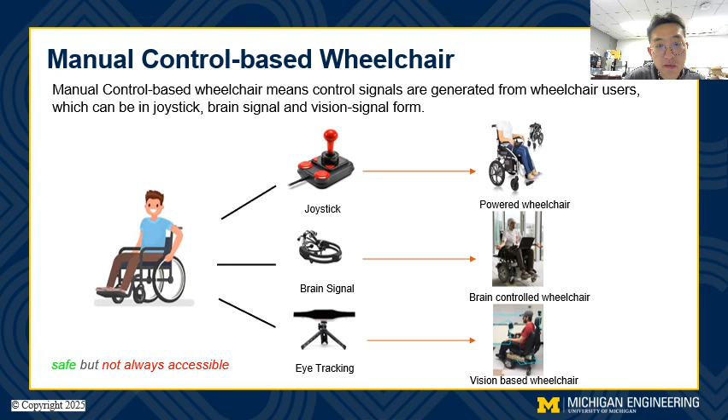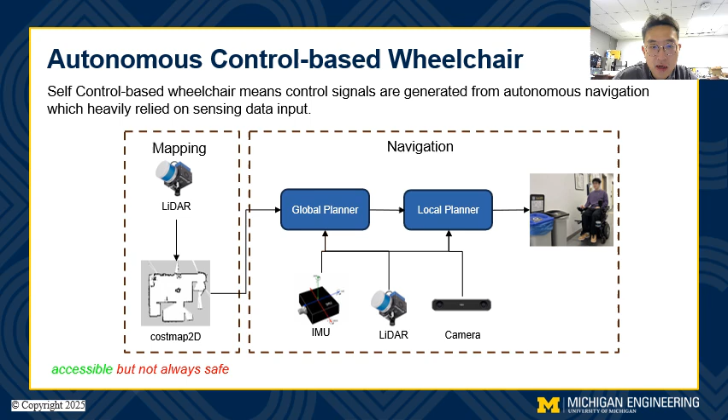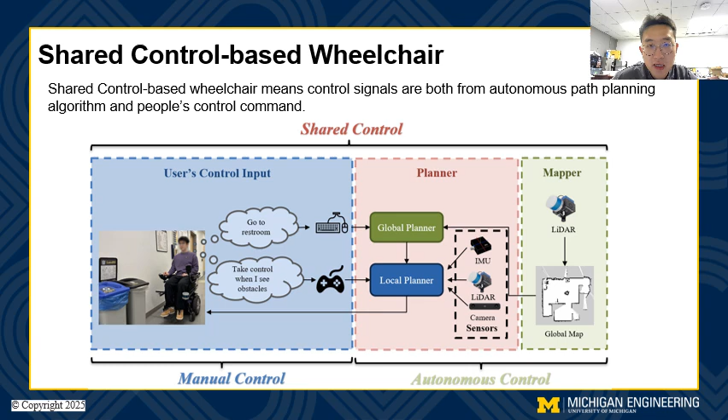Autonomous wheelchairs use LiDAR, cameras, and IMU to build maps and navigate without human input. They enhance accessibility, but often cannot adapt to every environment, which means they can struggle in dynamic environments. For example, they pose safety issues, especially when navigating near people. This motivates a shared control-based approach, in which both the user and the autonomous system collaborate. The robot will leverage perception and planning, but still listen to human input, making navigation safer and more intuitive, especially in unpredictable spaces.

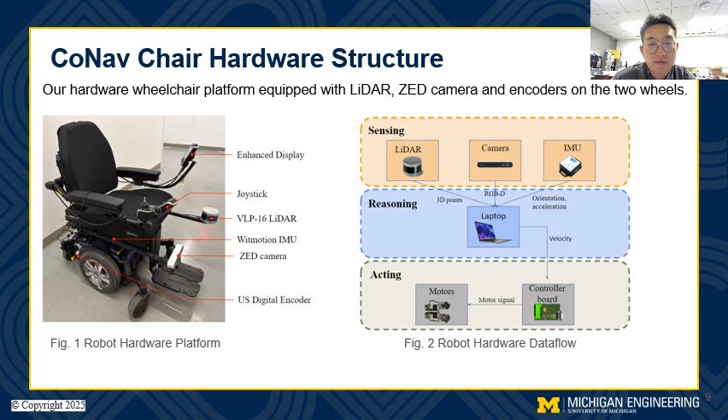Let's talk about the design of the CoNav chair. Our hardware platform, the CoNav chair, is built on a powered wheelchair base and equipped with a LiDAR, a ZED stereo camera, and a wheel encoder. This configuration supports robust sensing for indoor environments. The software stack integrates the user's input with autonomy. It includes a global planner informed by the user's preference, a social area detection to respect pedestrian comfort zones, and a socially aware MPC local planner with a dynamic barrier function that ensures safe real-time motion around people and obstacles.

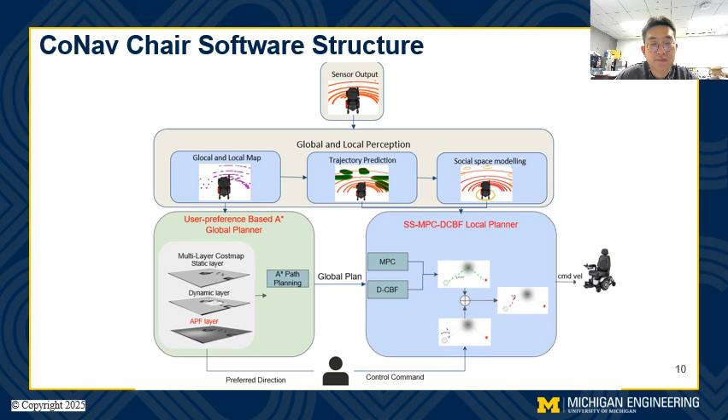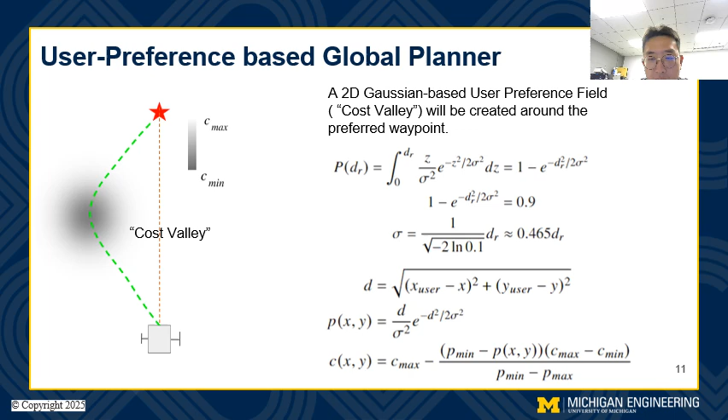To begin with, in a path planning pipeline, a path from A to B is usually planned as a straight path as optimal, but things will be different when considering the user's preference. So to take the user's preference into the global planning pipeline, we use a 2D Gaussian-based user preference field, creating a cost valley around the user's preferred path waypoint. Since the path planning algorithm always plans the path that yields the lowest cost, the generated path will be attracted to the user's preferred waypoint based on the cost map, while avoiding the obstacles.

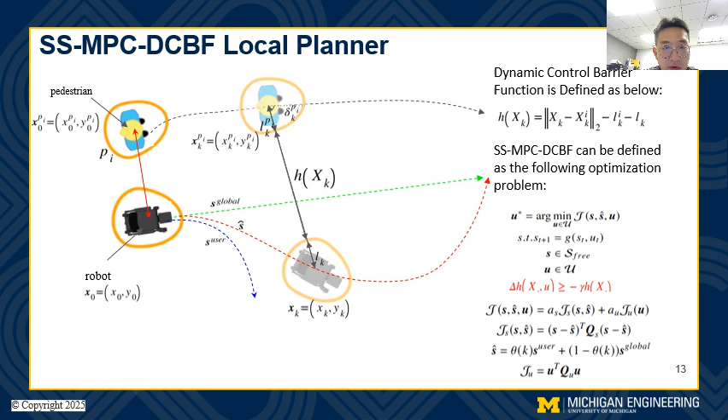For the local planner, we proposed a socially aware MPC with a dynamic control barrier function, which takes the pedestrian social area and the user's control into the local planning pipeline. One additional condition for the dynamic control barrier function is calculated in the MPC constraint, and the user's control is taken into consideration in the cost function. It will help the robot avoid obstacles and generate a safer and more effective path.

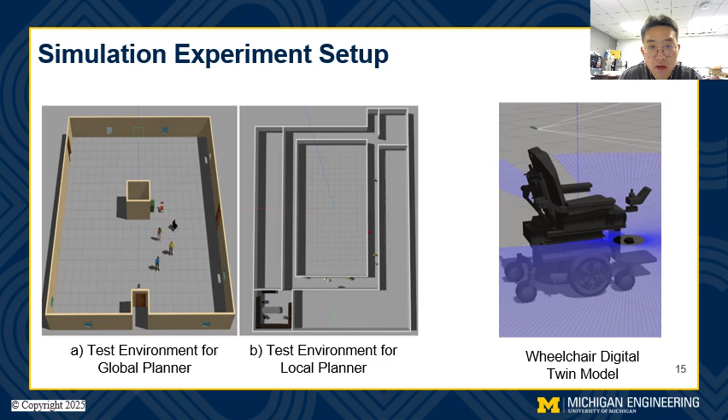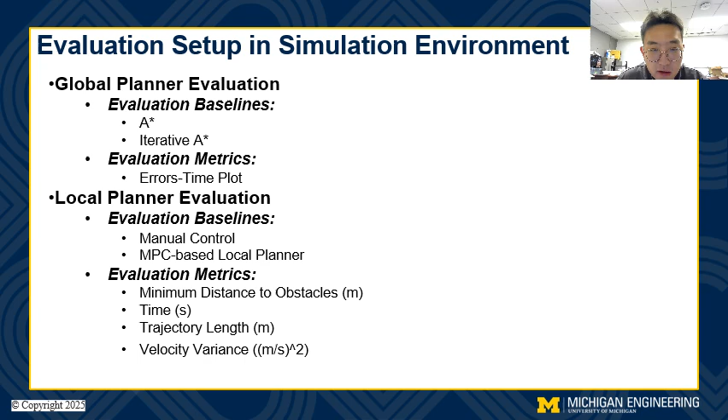Then let's talk about the experiment and the results. We used two simulation environments to test our framework: an open space with one side full of obstacles to test our global planner, and a narrow corridor with obstacles to test our proposed local planner. And on the right side is our wheelchair digital twin model. We evaluated the global planner on path accuracy compared with the user-designed path, using metrics like the error-time plot. And we also evaluated the local planner using metrics like obstacle distance, time, and trajectory smoothness under static and dynamic conditions.

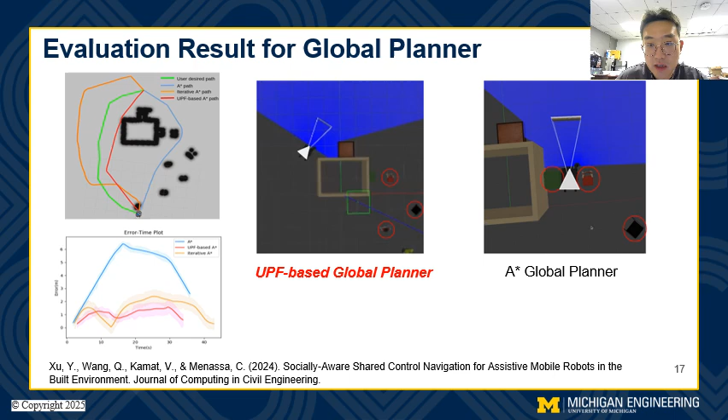Compared with the baseline A-star, our user preference field planner reduces the error over time by steering the path closer to the user's intent. And from the plot on the right side, the proposed planner can generate a less risky path compared with the general A-star global planner. In static environments, from the figure, the shared control outperformed both manual control and fully autonomous MPC-based control. It leads to fewer collisions, smoother paths, and shorter time, showing the benefit of incorporating users' input even when navigating through tight spaces, such as the corridor.

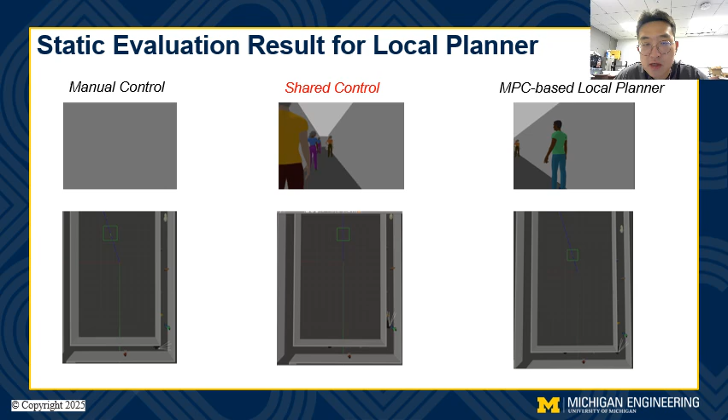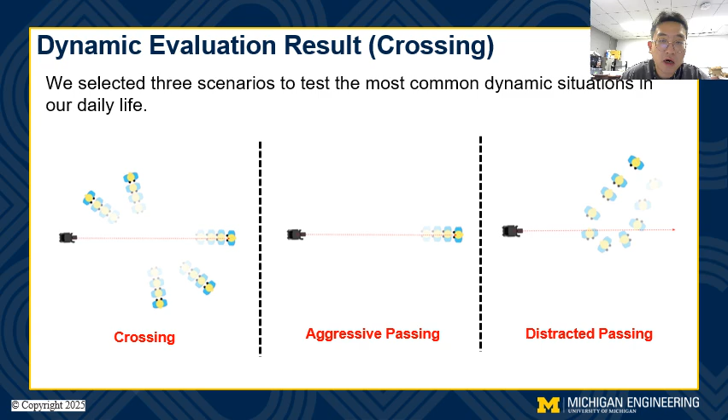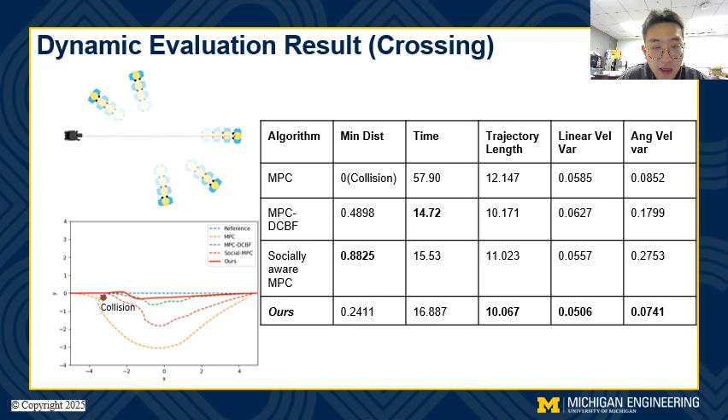We selected three different scenarios: crossing, aggressive passing, and distracted passing to test the most common dynamic situations in our daily life. In the crossing experiment, we allow the robot to pass through 5 people, in which all people are aware of each other's movement using the social MPC. From the results, the shared control demonstrated a smoother path and higher efficiency compared with other baselines. In the aggressive passing experiment, people and the robot go in opposite directions, where people aren't aware of the movement, which forces the assistive wheelchair to react accordingly. With shared control, the users were able to slow down or reroute early, showcasing a safer and smoother path.

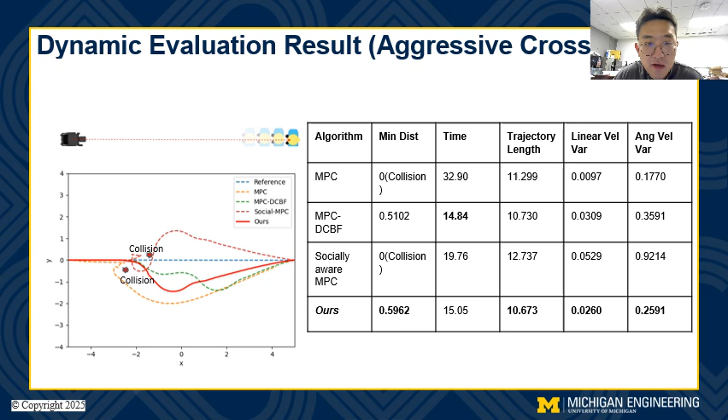We also simulated cases where pedestrians behaved erratically in distracted passing scenarios. So in these distracting scenarios, the shared control helped the robot avoid sudden intrusions and change direction accordingly. Our proposed method is the most efficient, safe, and smooth method according to the different kinds of metrics shown in the table.

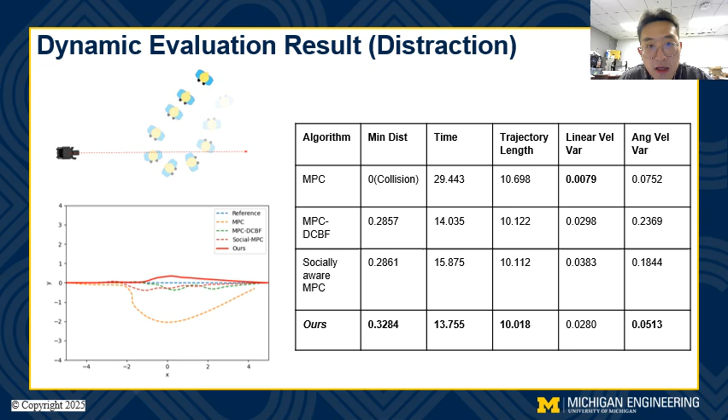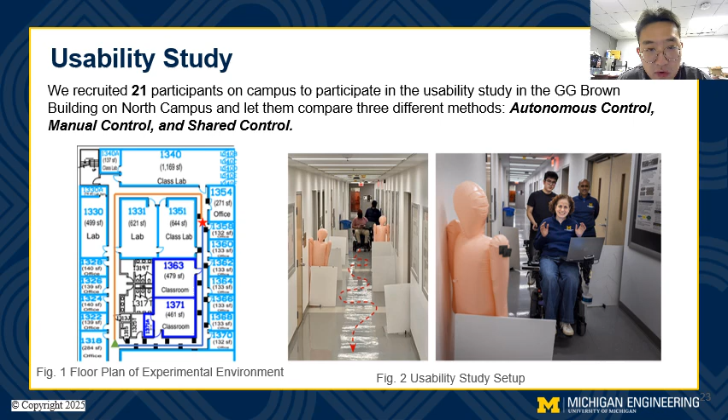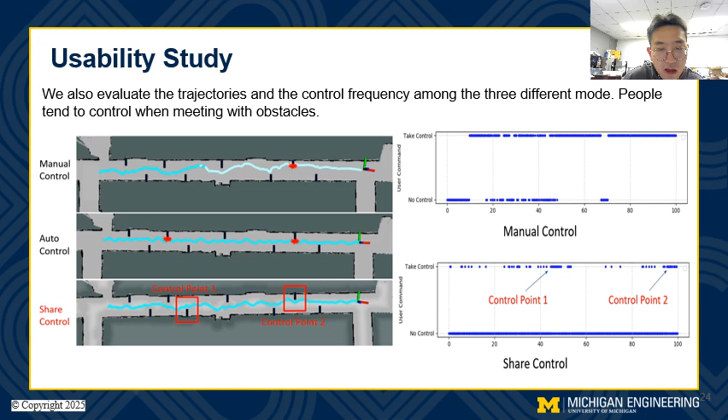Besides the simulation experiment, we also recruited 21 participants and conducted a real-world experiment in a university building corridor. Each participant tried to navigate in three different modes: manual control, autonomous control, and shared control. The study aimed to assess usability, safety, and satisfaction. We observed that in shared control, the user primarily takes over control when near obstacles, indicating trust in autonomy, but also a desire to assert control when necessary. The control frequency of shared control is much smaller than manual control, indicating a lower mental requirement.

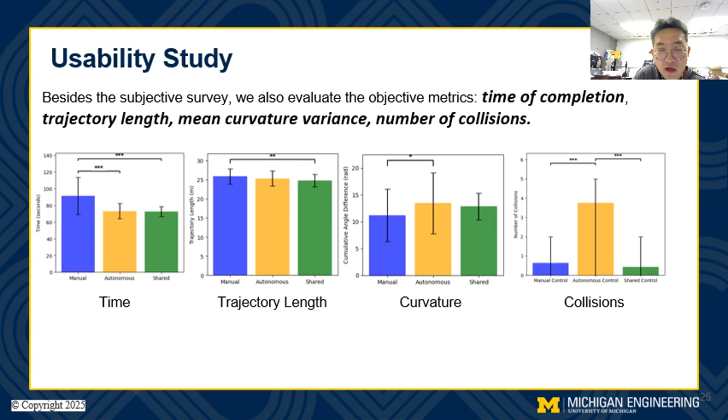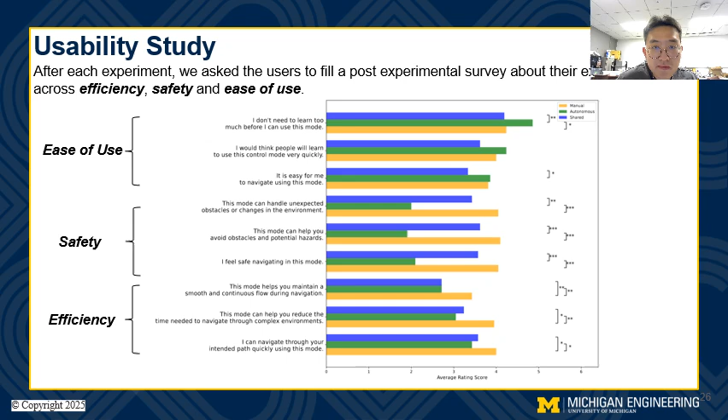Now to the conclusion. To conclude, the CoNav Chair demonstrates that shared control significantly enhanced indoor navigation for people with disability. Looking forward, we plan to reduce the system latency and integrate alternative inputs like voice and eye tracking to better support users with limited ability.